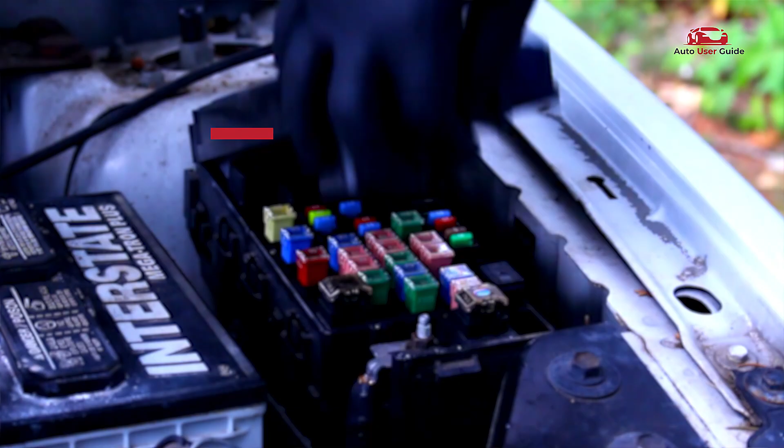Are you trying to locate the fuse box in your 2018 Buick Enclave? Wondering where each fuse is placed or how to read the fuse box diagram correctly? In this guide, we'll walk you through the exact location of the fuse box and provide an easy-to-understand diagram to help you identify the fuses for various systems.

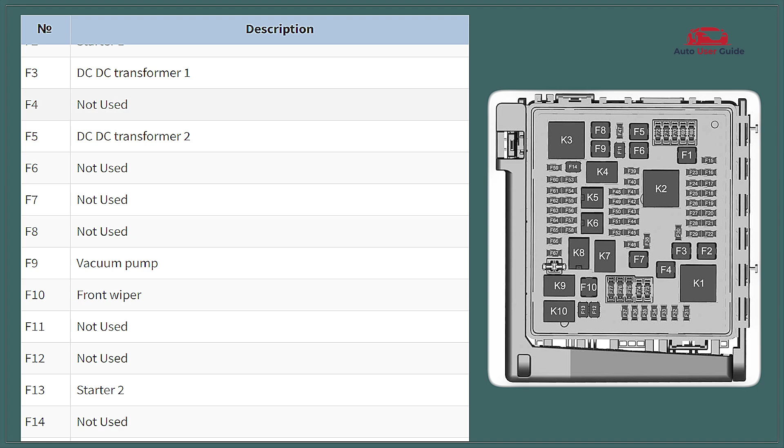Engine compartment fuse box. The engine compartment fuse box provides centralized power distribution for key systems like the ECU, ignition, and fuel pump. It protects circuits from overloads and short circuits while aiding in electrical diagnostics.

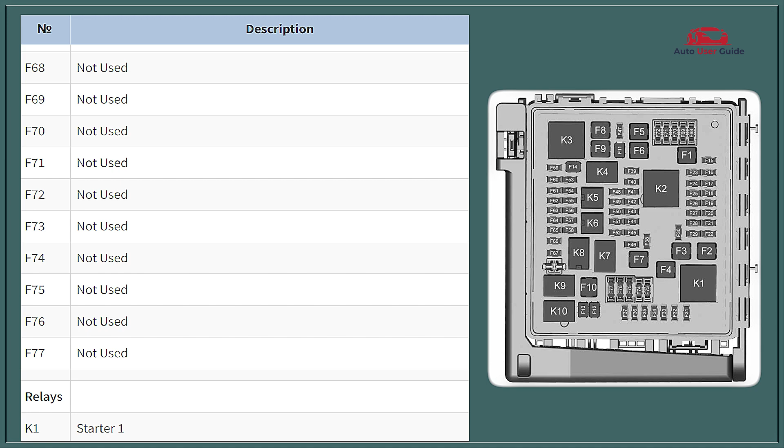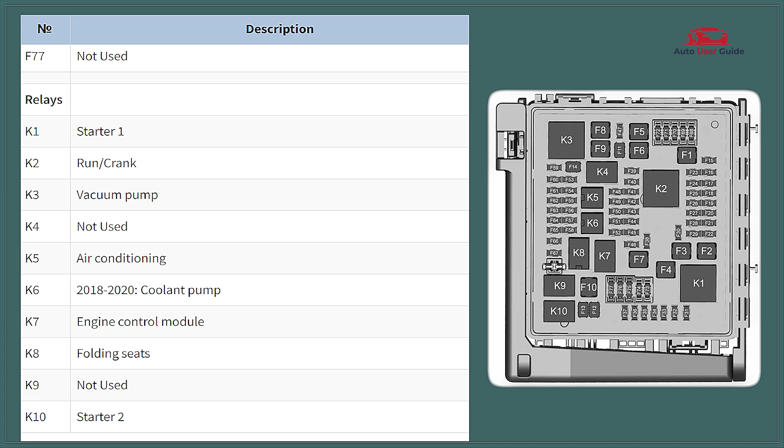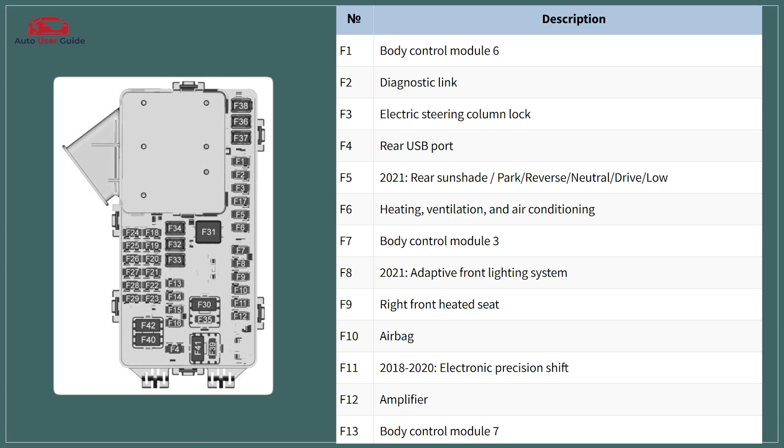Instrument panel fuse box. The instrument panel fuse box controls and protects electrical circuits for interior components like lights, infotainment, and climate control. It ensures safe operation and simplifies fault detection in the vehicle's cabin systems.

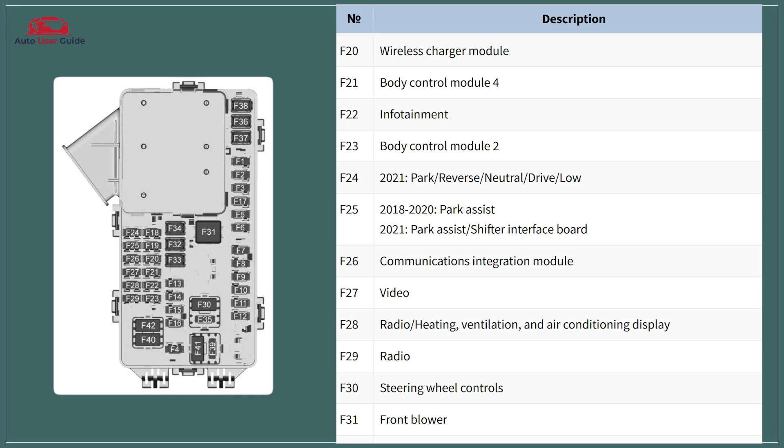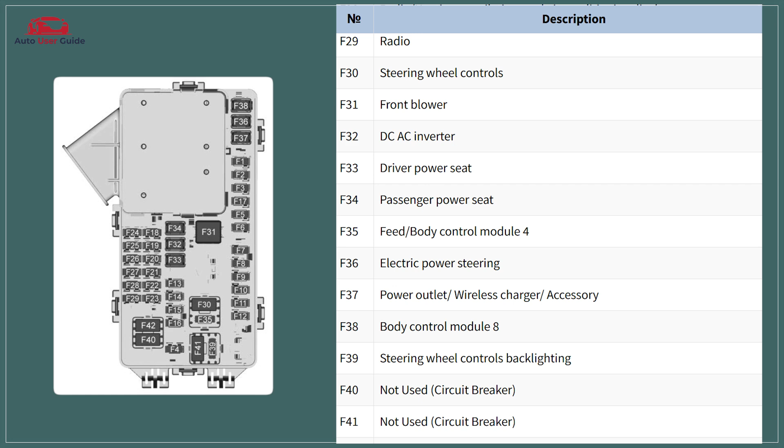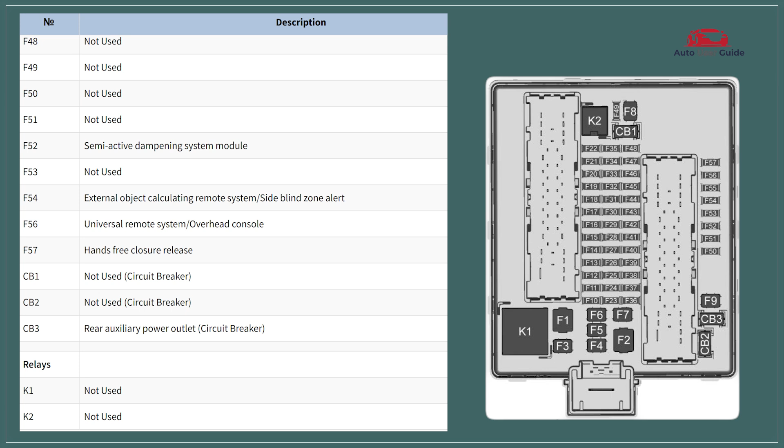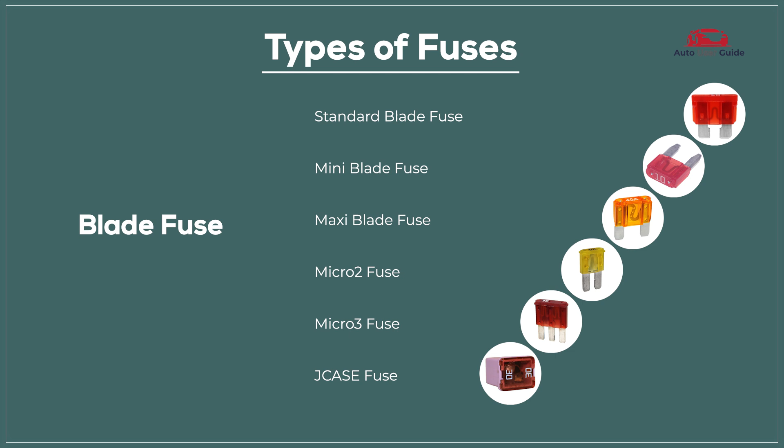Glass tube fuse, AGC fuse, SFE fuse. Ceramic fuse, Bosch fuse, DIN fuse.

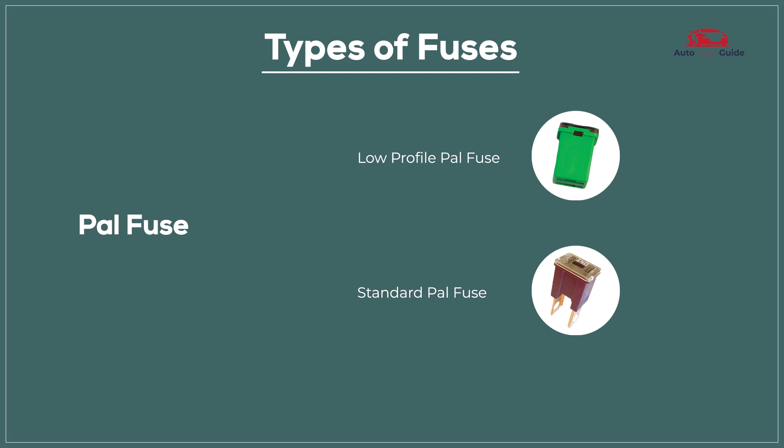PAL fuse, low profile PAL fuse, standard PAL fuse. Link fuse, mega fuse, high amperage link fuse.

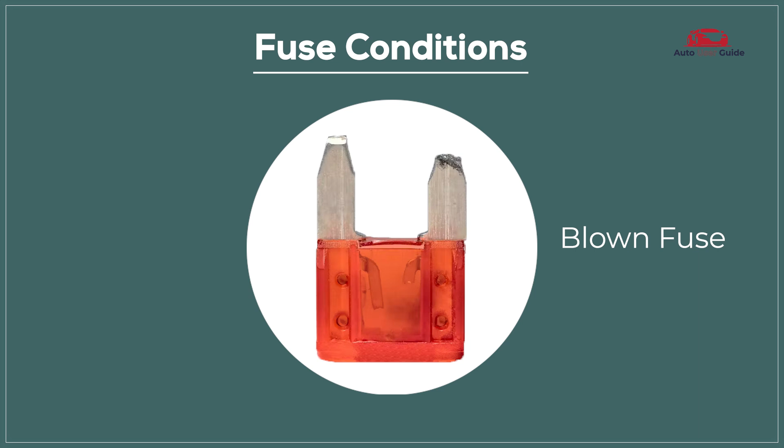Fuse conditions. Blown fuse: a blown fuse means it's no longer functioning and needs replacement, while a perfect fuse is in good working condition and performing as expected.

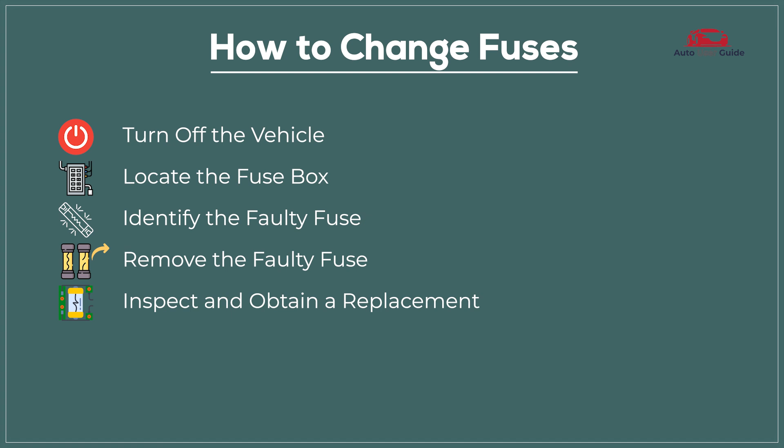How to change fuses: turn off the vehicle, locate the fuse box, identify the faulty fuse, remove the faulty fuse, inspect and obtain a replacement, install the new fuse, and test the replacement.

Safety precautions: disconnect the battery, wear protective gear, use proper tools, check for correct amperage, and avoid water exposure.